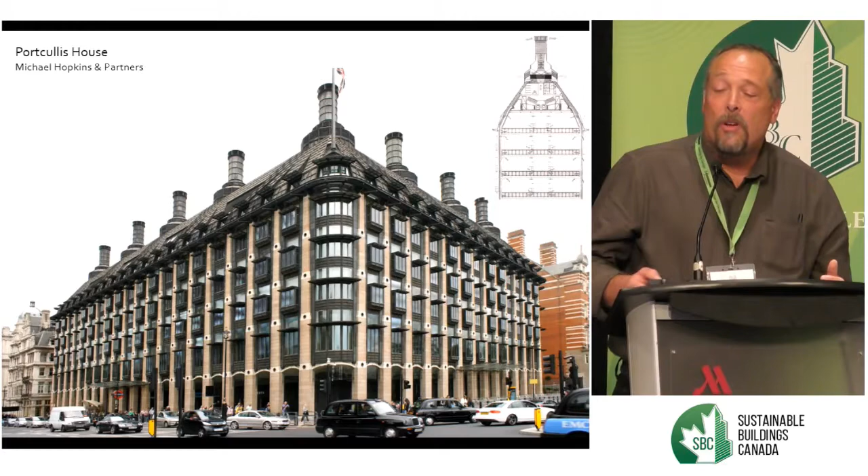We didn't succeed in all respects, but these are starting to be interesting progression towards a contemporary vernacular. And I think that's important because when I walk around many international cities, all I see is a developer simply elevating his plot at the maximum plot ratio the planning department will allow him to get away with. And you just see a series of cubes of different heights depending on how many planning officers they took out for lunch.

There is more to the design of cities than lunching, and not much, but some. There are various principles which the Canadian Green Buildings Festival is really examining, and really the key thing seems to be how do we achieve an architecture which is at best climate neutral. In other words, it doesn't contribute to accelerating climatic change.

So I'll just finish by saying this is a university campus that I designed, a competition we won again at the end of the 90s. And I left the office I was working with because my boss said it's just a very big garden shed.

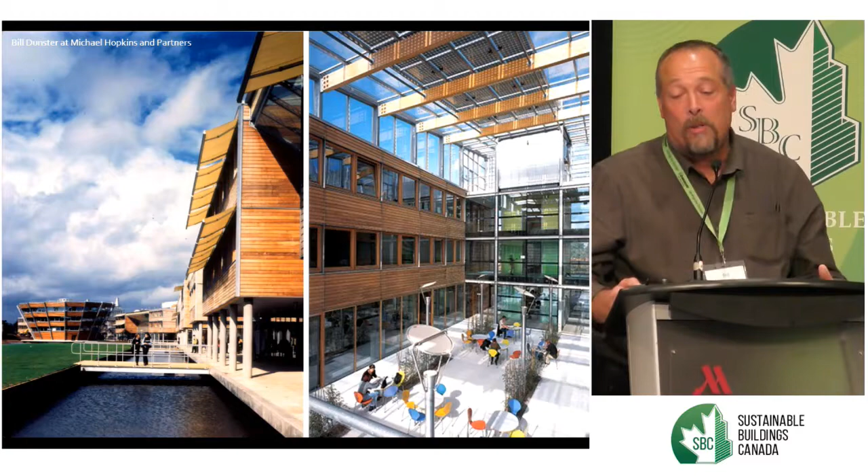And I then realized that actually there was literally no point in designing energy efficient buildings if you didn't address the integration of transport and all the other ecological and carbon footprint issues that are related. So here you can see the first sunbathing island in Nottingham in the middle of a large rainwater storage lake.

So we then built a house following that project to try and show how we could do everything better if we were the client, and my poor wife was the clerk of works, and spent most of her time chasing small builders in and out of the local public house, which is how you get buildings built in the UK.

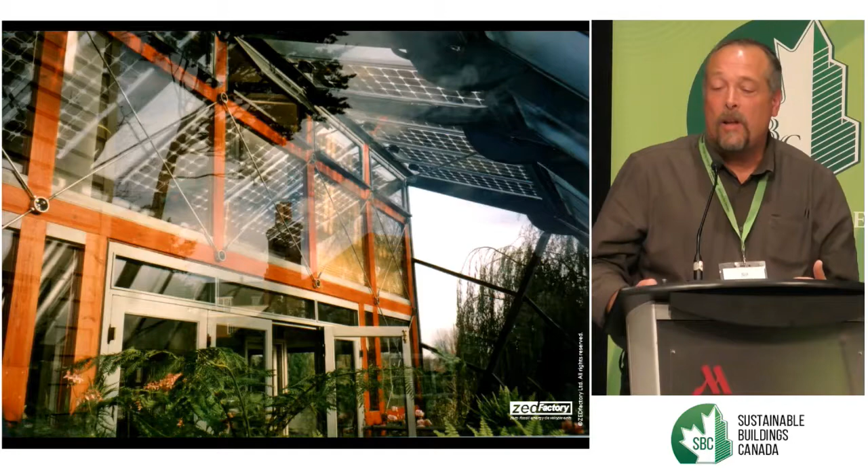You can start to see how some of these ingredients come together. There's a large red shear frame which takes the wind loads but also lets very large amounts of solar gain deep into the plan. It was designed in a flood zone, and every year I'm nearly flooded. We never quite get there, but we did come in with all the services at high level. They come down, and the walls of the ground floor are internal brickwork inside and out, with styrofoam insulation built into the wall, so it's possible for it to be hosed down and back in action perhaps a couple of weeks after a major flood.

This was all designed in the early 90s, and at the time it was regarded as a complete joke. Climate change wasn't really discussed at conferences like this in the early 90s, and it just didn't come on the agenda at all. The fact that there was going to be overheating and so on was really unheard of.

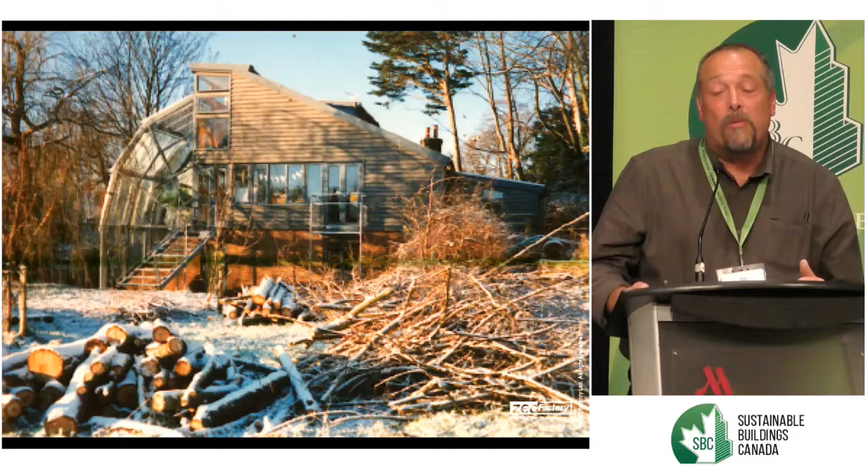A couple of years ago, virtually the entire Thames Valley flooded, and about 4,500 homes had exactly the same problem as us. So we decided to try and set up an architectural practice somewhere between an environmental pressure group, an architect's practice, a master planning practice, a product designer, and perhaps a little project management. We decided to develop all the ingredients needed to make it as easy as possible to deliver a low carbon lifestyle.

We called it ZEDfactory because although we don't actually have a factory, I spend all my time visiting factories, trying to persuade them to change their products or make one component that makes this holistic proposition as affordable and easy to specify for us and other design professionals.

We set up this idea that we could move beyond architecture and get into transport and food production, really looking at all the ideas of a low carbon future and integrating them into one holistic plan. This was well before BREEAM was really going, particularly with regard to the residential sector in the UK.

We worked with WWF and set up this concept of a one planet lifestyle. The idea was to show that you could lead just as high a quality of life with a one planet level of resources as the current three planet level of resources being experienced, and still experienced, in the UK at that point in time.

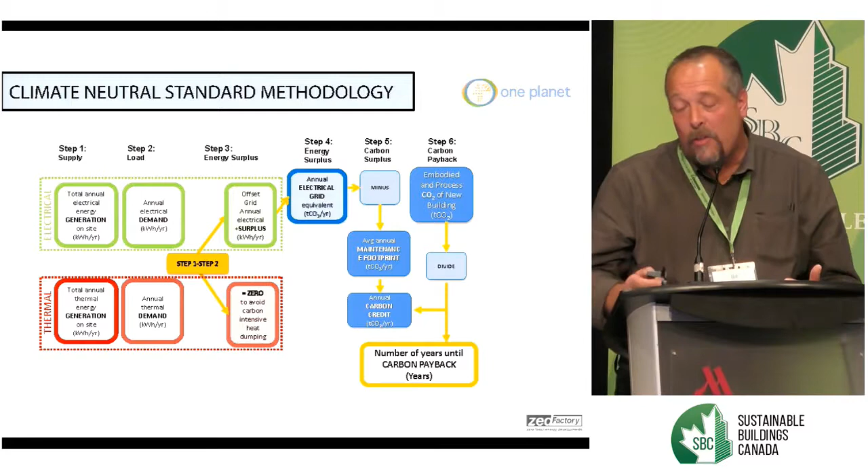So what then happened was we went around talking to social housing providers, trying to find developers, and they literally looked at us as though we were Martians. There was just no interest in this at all. And if you then explained that we actually wanted to provide buildings which made no net contribution to climatic change over their entire lifespan, that was regarded as just insane.

However, we just heard this morning that there's a whole room of people trying to do exactly that. So we have a very simple methodology. I don't believe necessarily in too many checklists and too much interrogation of very detailed data, although monitoring is terribly important as the feedback loop. I think you can make it very, very simple.

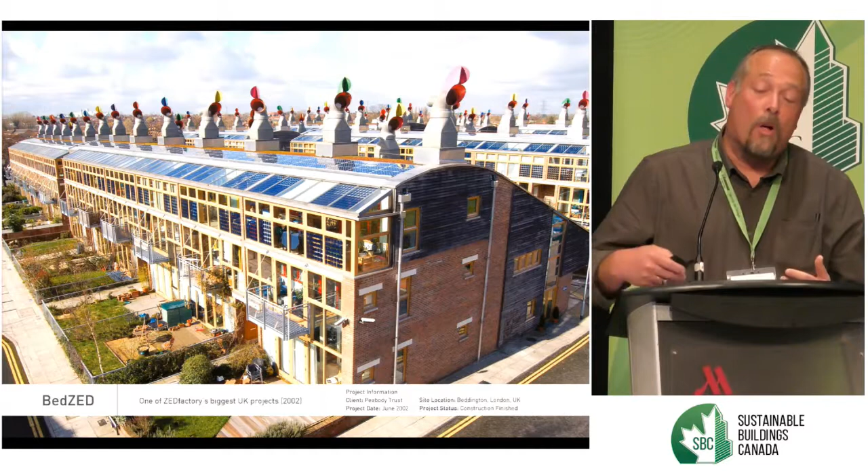And they didn't like that at all. So we lobbied and lobbied and lobbied, and we worked very hard with the politicians, and in the end, we were allowed that the site wasn't sold to Barratt Homes. We bought it for a tiny amount less money on behalf of a local housing association, and we built this project.

This project was intended to show how if the UK had to build, which it still does, millions of new homes, it could do so without building them on agricultural land and green belt. And that was important because the UK is currently importing, was then and is probably more now, importing in excess of 70% of its nutritional requirements.

And often it's coming from a very long way away, such as Africa. So it becomes very important to show how you can have reasonably high density housing models which are affordable to build, are suitable for families, and are really relevant without always turning to high-rise and apartment buildings as being the only urban model worth having.

Now, this has to also be remembered that 70% of the housing in the UK is 50 homes per hectare or less. So one of the things we looked at was housing we'd stayed in, and this is Georgian key workers housing in Edinburgh, which I stayed in when I was at university. And this is Roupell Street, which is old Victorian social housing where you literally had one family in each room, and that's at Waterloo Station.

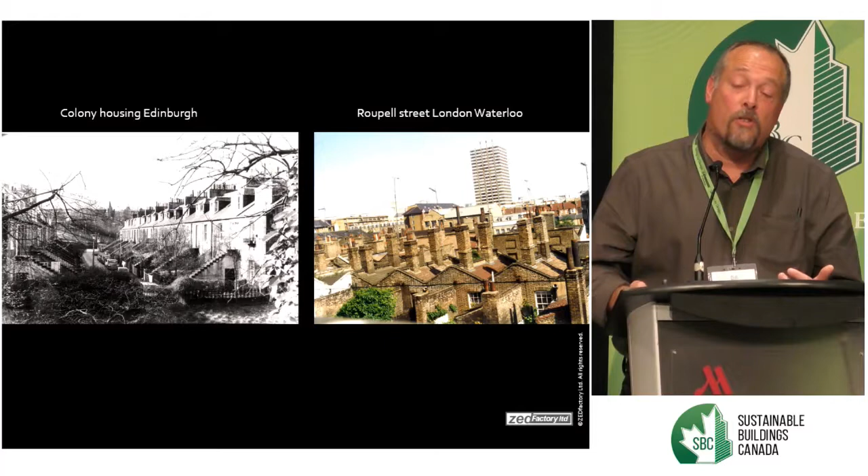The idea was to show how just using the available footprint of brownfield land that was actually ready for redevelopment or regeneration, we could meet the UK's housing requirements.

No one asked us to do this. This was just a way of trying to explain that there were new ways of creating communities which were not in any shape or form following what was being taught or promoted by the government at the time. And there are huge manuals written mainly by new urbanists.

Do you have new urbanists here? Yes, anyway, Andrés Duany, all that stuff.

Manual for streets. There's a sort of classical way of designing which really didn't respect solar energy, didn't respect any environmental determinants that we could see at all.

And then the next thing was we found that we were heavily criticised by the Prince Charles's School of Architecture, who has a mission to, or did have a mission at the time, to try to recreate Georgian England, which was probably the time when the promoters of this school of architecture felt happiest.

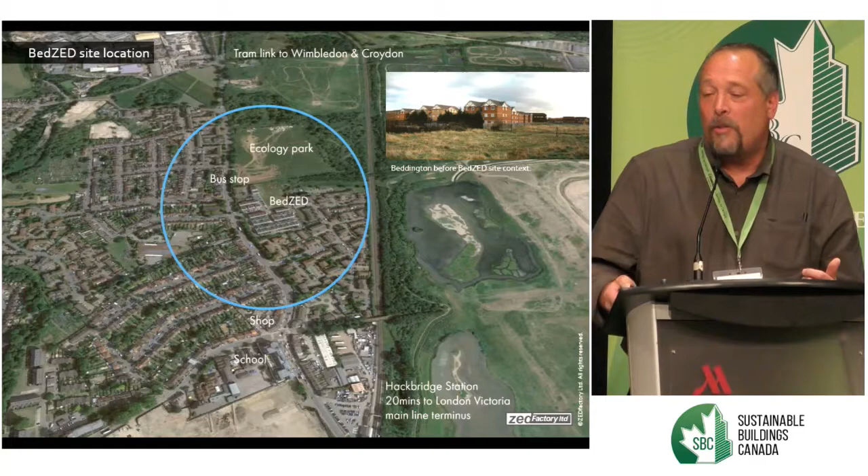So you can see that the housing that would have been built on this site in the top of this slide, and we dreamt up a complete transformation. We were going to plant short rotation coppice, have a gasified wood heat and power plant, a lavender plantation with keyhole beds for picnicking in to start to reduce the smell.

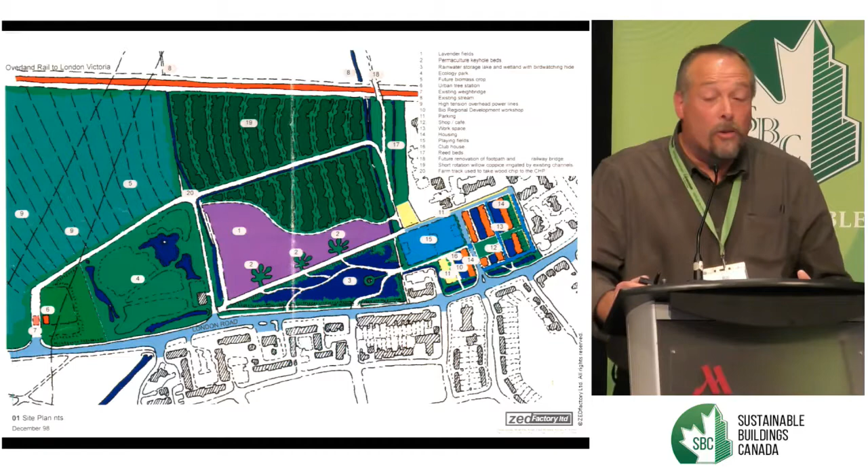We were going to regenerate the local community by introducing jobs back in, setting up reverse commuting so that people came to work here again instead of just going in one direction towards the city centre every day. Start to get more of a 24-hour feel to the place. So what did the local council do? They designated these surrounding fields for gravel extraction and landfill.

If you cook a meal once a day, you have the potential for near zero heating bills. You only need some hot water for washing. So they're thermally extremely efficient, and that's working very, very well. We tried to get good levels of daylight. We tried to give everyone their outdoor personal space.

As climate change accelerates, you can see the living rooms moving across into the gardens. And we tried to get a reasonable density. We got to the point where, if everything works perfectly, it can just about achieve a one-planet lifestyle, providing you don't go on a holiday to the Costa del Sol.

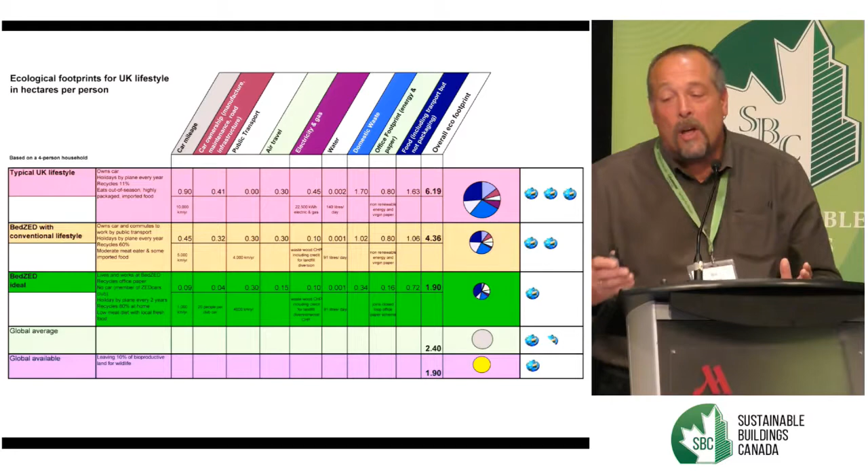So that's the thing that changes everything. If you can—and I don't really feel apologetic about this—I feel we shouldn't tell people how to live, but we can set up the infrastructure and the framework that enables them to adopt this environmentally responsible lifestyle. And they should do it because they want to, because they're personally motivated, or because it's economically sensible for them to do so. And that's great, but there should be no coercion involved, because there lies eco-fascism.

And there's plenty of that coming, because as climate change accelerates and environmental degradation gets worse, there will be draconian responses to disasters.

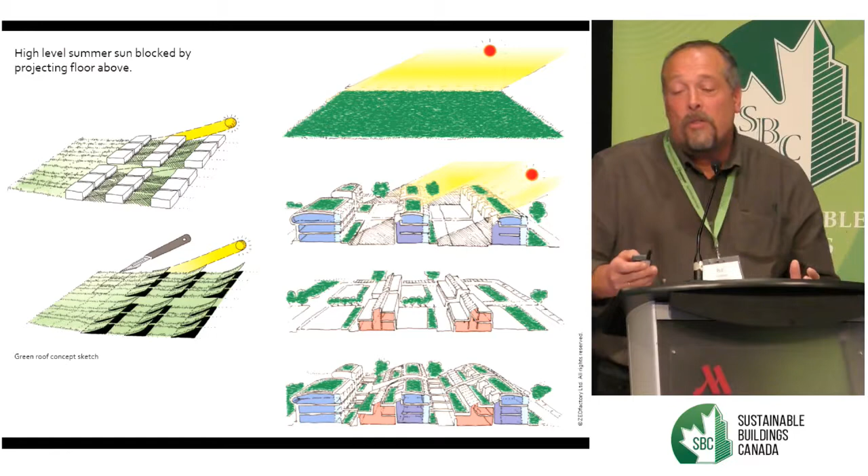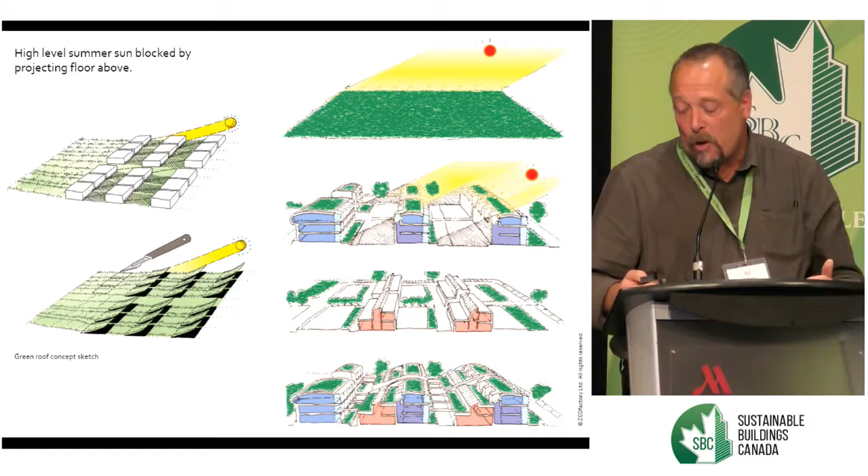The idea was to try and inhabit the site. So you started with an overgrown bramble field. We try to insert the human accommodation, then we try to relay the landscape on top. And that's what it looks like today.

You can see the roof lights getting daylight down to the workspaces and live-work units, which are placed in the shade zone of the housing. The buildings are aerodynamically designed so that the prevailing wind is tracked by the rotating wing cowls, and fresh air goes in the small end and preheats. The incoming fresh air is preheated through oversized flat plate heat exchangers by the outgoing stale air. So the whole thing is ventilating and breathing, and it is a genuinely nice place to live.

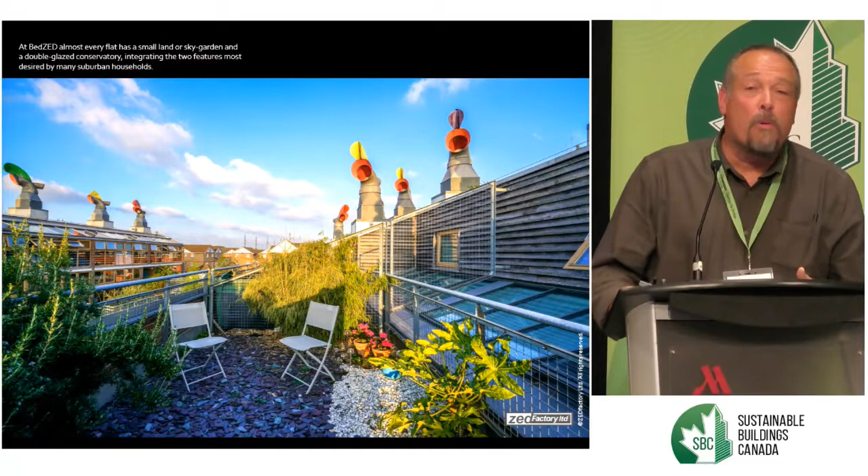We had the first 15-year celebration last weekend, and it was entirely run by what we call BedZED babies—children who have been brought up in this village, and that's the only life they know. They are completely different, much more optimistic and open about the future than other kids we come across who are maybe living in quite degraded urban environments.

And it also has to be remembered that this is not a wealthy community. This is 1/3 social rent, 1/3 shared ownership, and 1/3 private for sale. So this isn't for rich people.

My point here really is to say that the British suburban model, where a developer just goes 3 stories high—and we were restricted to 3 stories on this site—with a pitched roof, has been totally reinvented. The density is exceeded. In other words, we're getting more accommodation on the site with these ground scrapers, and the amount of social amenity, which can be quite easily measured.

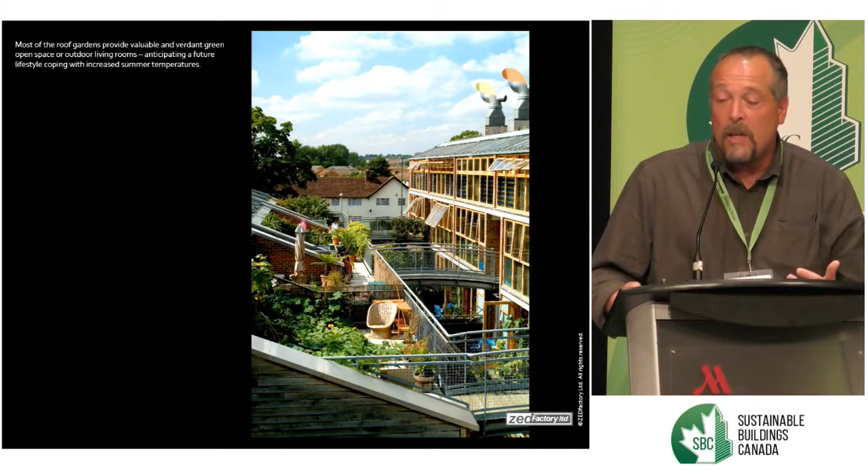Green open space per capita, public open space per capita, seasonably occupiable space such as conservatories or sun spaces per capita. There's all sorts of environmental measures that we've been developing over the years, and it works quite well.

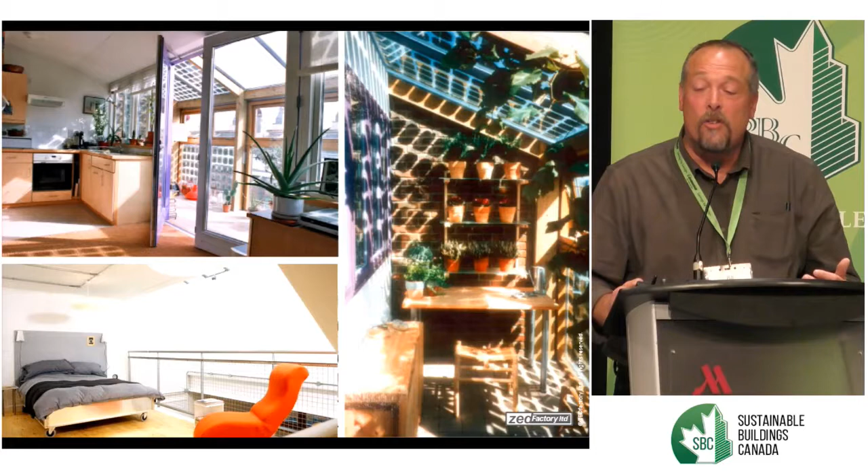There have been mistakes. As I said, we weren't anticipating climatic change as fast as we did. Some of the clients missed fitting the roof light openers off—so although the windows are designed, the roof lights are designed to open, the openers never actually got fitted. But on the whole, it's the passive environmental principles that make this development worthwhile.

So it's the architecture and building fabric first strategy, which is the message here. All of the mechanical things, such as the wood chip fuel combined heat and power plant, which were claimed by all the environmental consultants and technology manufacturers, broke really quickly.

What's interesting is simplicity and minimizing reliance on technology if you can. So here you can see, as suggested by another speaker earlier, you've got the flat above or the balcony above, shading the real elevation, which is set in 1.8 meters.

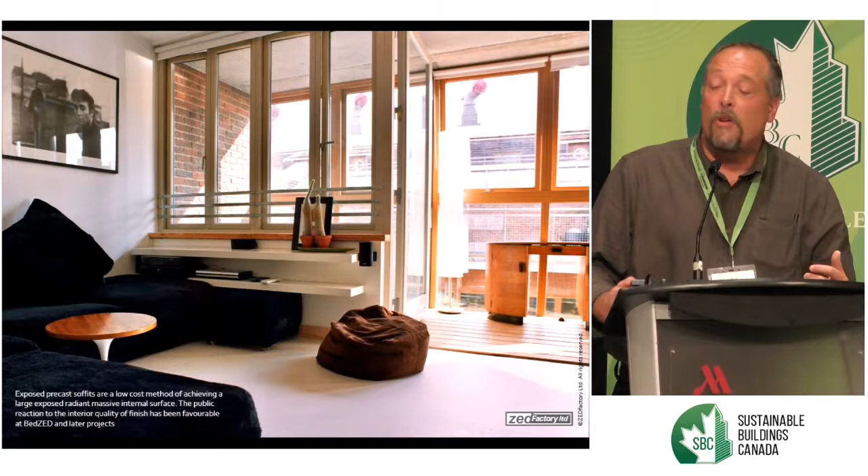You've got two layers of double glazed screens. You've got a seasonably occupiable sun space, which can increase the floor area of your living room. And then you've got exposed radiant concrete soffits and floors, which gives you a very good element of passive cooling.

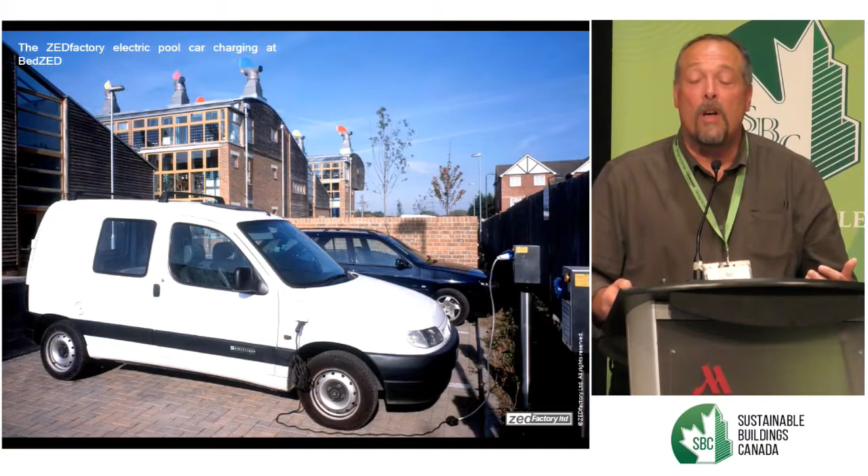We incorporate enough solar electric panels on the building surfaces without affecting daylight to power pretty well an electric car for everybody who lives there. They're not all running on electric cars, but they have the opportunity to over time. So the energy for an electric carpool will come almost entirely from the roof integrated PV.

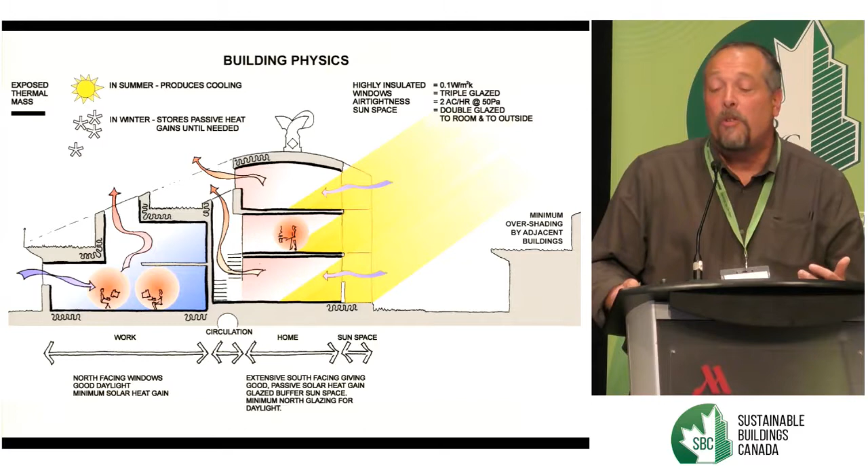With these simple ideas, we then developed a range of tools which can really be used on a whole range of different other constructional systems, solving different problems, different densities, and so on. We started off working with masonry because we felt that was pretty standard. In the UK at the time, everything was made in brick and block.

We developed a special wall tie that hooked in so you could build the outer leaf independently of the inner leaf, and then that went on the market. We do full fill cavities using rock wool.

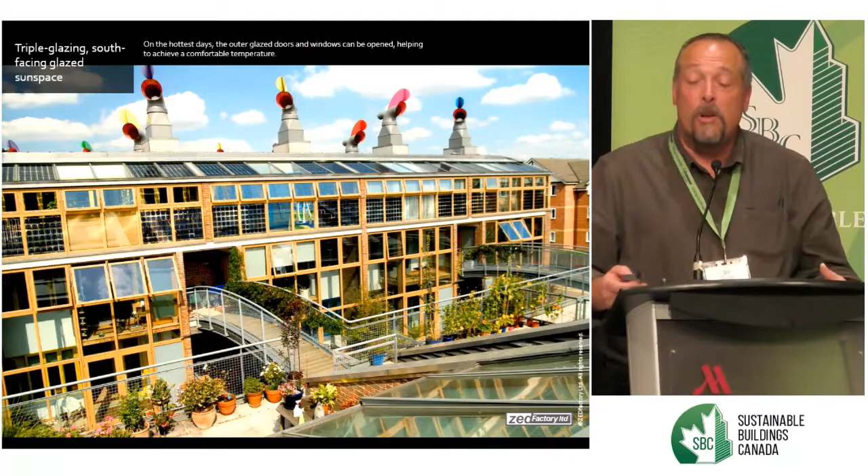We managed to persuade a major window manufacturer to offer photovoltaic cells integrated within a wooden system rather than an extremely expensive, mainly German aluminium system. We used recycled steel taken from other construction sites and demolition sites and refabricated it with re-welding end plates on, and that had a major reduction in carbon footprint.

We used reclaimed timber, which was a real fight actually for all the internal stud-work partitions, because the developers and the contractors desperately wanted to use light gauge steel framing, but this really created quite a lot of employment.

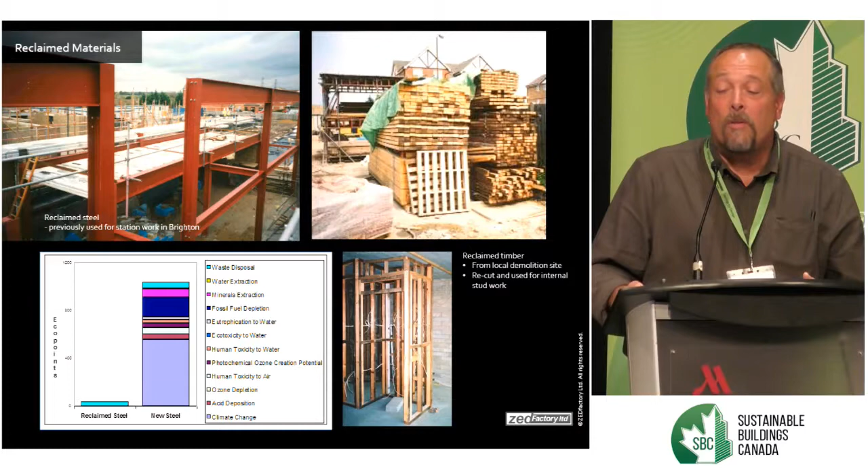We spent a lot of time with the National Physical Laboratory in Teddington developing a wind cowl which turned down to 1.5 meters per second ambient wind speed, so it always had positive pressure at one end and negative at the other. We've tested all the ductwork systems with tracer gas to check that it met the building regulations for minimum ventilation requirements.

So this is a lot of work to put on some poor architect trying to design social housing, and no one's paying for it other than us. We do this work because we are trying to get things better.

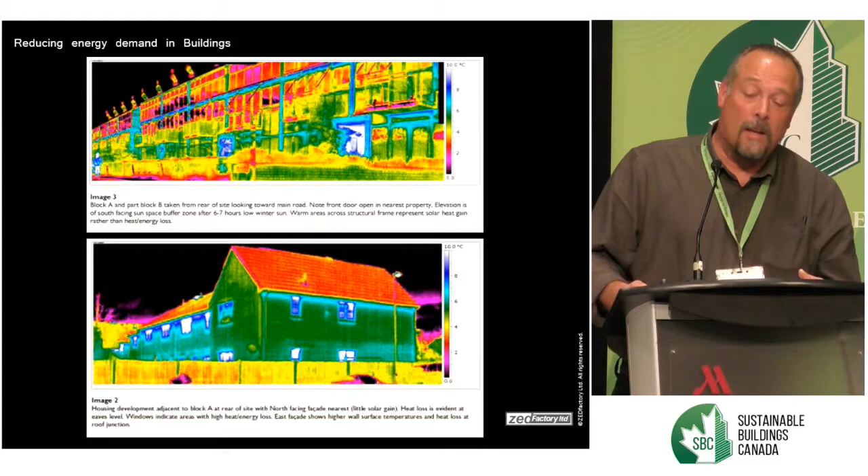That's an infrared shot of BedZED. Even the glazing systems on BedZED are warmer in the middle of winter than the insulated walls on the adjacent volume house builders' blocks. BedZED is far from perfect, and it can be better, and we've learnt a lot from this process.

The first thing, perhaps, is not to believe it when someone tries to sell you very advanced high technology. The second thing is don't rely on a public utility to run grey water treatment plants or black water treatment plants unless you can help it.

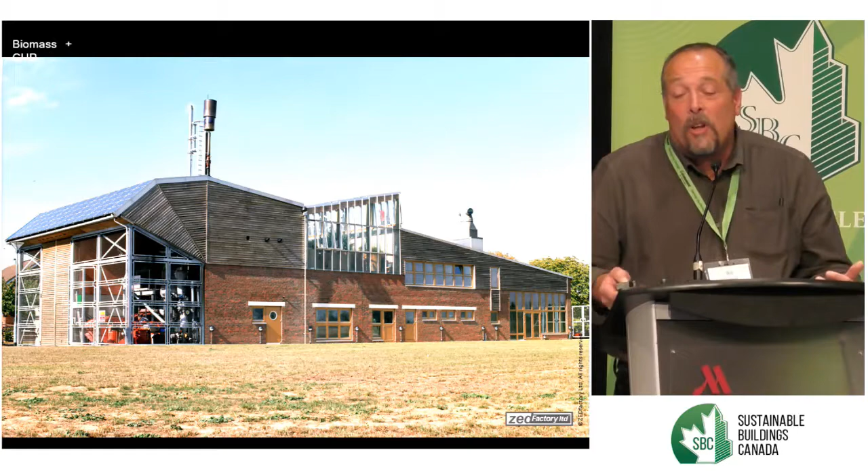The combined heat and power plant, I think, probably worked for about 6 months and never reached full output. It was very much a prototype sold as a viable thing, and the company that fitted it then promptly went bust. It worked on local wood chip, which was supplied from urban tree waste, which was the easy thing.

However, you can't write off this, because now new technology is such that you can get a very nice Austrian - note the nationality - wood pellet machine that does exactly the same job, is reliable, and produces large amounts of hydrogen-rich methane gas, which can go into a conventional CHP gas engine. So that totally ties up with the ideas you heard earlier today, that the gas grid can be supplemented with organic gas that is actually generated from renewable energy sources.

And on subsequent projects, we also use wood pellets in the normal way, using wood pellet boilers.

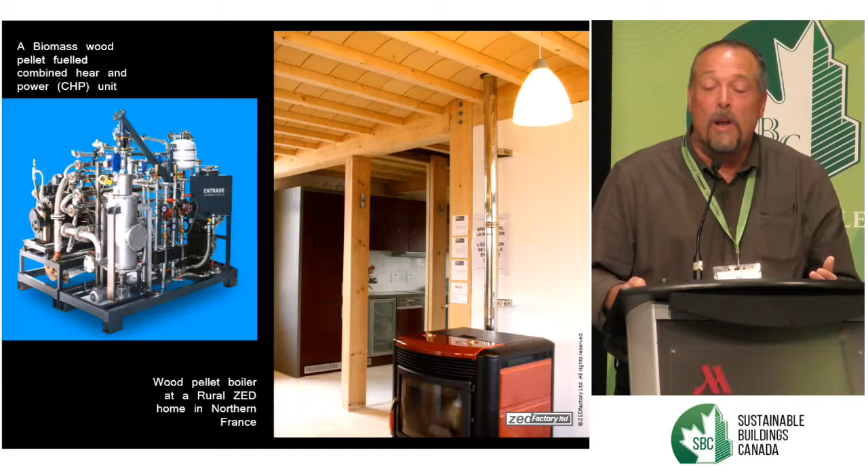So that's really a short history of BedZED. From an urban design point of view, it broke every rule there was in British urban planning about what makes good urbanism.

But we've tried very, very hard on the placemaking agenda, and we maintain that actually it's a lot better than some of the traditional, perhaps more conventional urban projects, which are obviously promoted as best case study exemplars.

So the local community, or the 4 London boroughs that surround this project, completely failed on their recycling targets and have just basically decided to burn all their organic waste in a 100-metre high chimney, which then dumps quite a toxic plume over very high density areas of southwest or South London, particularly Croydon, which is mainly Labour and mainly immigrants.

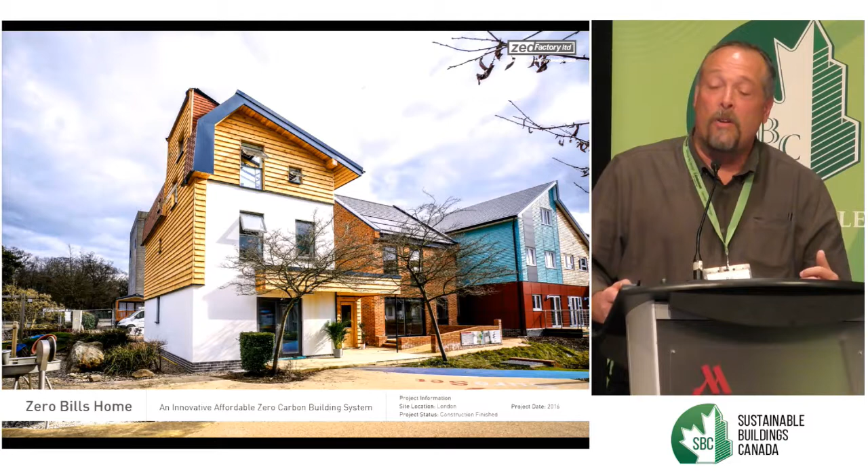So this is a game, and it's a serious one. And if we keep losing like this, we really are in trouble.

What we've done since then is perhaps more optimistic. This is a house kit. This has just been built at the BRE in Watford. You can build it with nothing more than a screwdriver.

And we've completely given up with governments. We've completely given up with standards because we've worked out how to build houses which don't have any net annual energy bills. And if it doesn't cost too much more to make these houses, why wouldn't you build them?

You don't need to worry about concerning yourself with carbon taxation and this and that, because actually the cost of electricity or the cost of energy is rising steadily, particularly in the UK, and the cost of building integrated renewable energy and electrical battery storage is coming down. Again, nothing to do with our country, but it's because economies of scale are being reached in other countries, particularly the continent and China.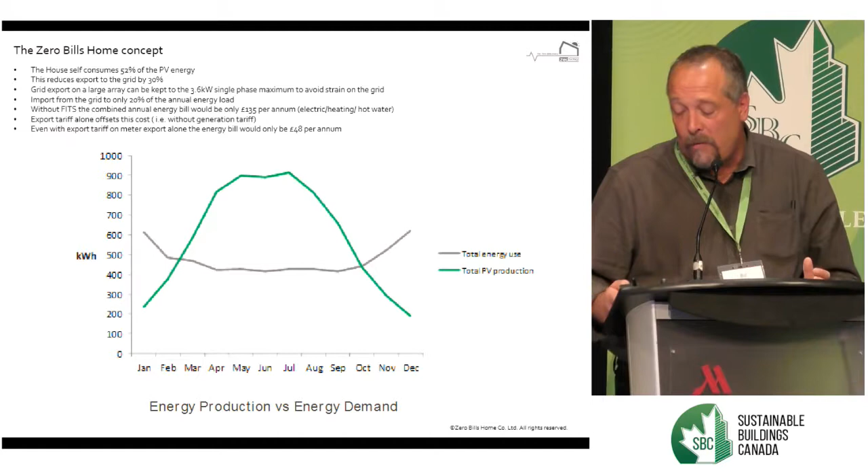So what this shows is a house that looks like that, with a slightly eccentric south-facing roof surface. It's an east-west facing home that can generate approximately twice as much electrical energy as it requires to run it over a year, which makes it safely climate neutral. The total renewable energy generation is about 8 megawatt hours a year. The total self-consumption for running the home is about 4 megawatt hours a year. That leaves you 4 megawatt hours a year to run your electric vehicle that gets you to work in the first place.

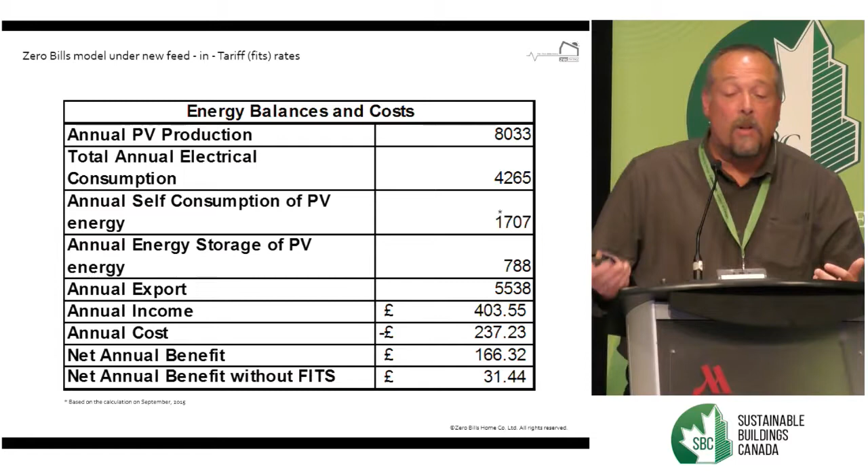So we see this as a game changer. We think the idea of regeneration projects that don't have any energy bills is possibly a politically acceptable way forward, no matter whether you believe in climate change or not.

And the current situation, that is not the case in the United States, and it's not the case in London at the moment. The current political administration are starting to question whether climate change is happening. So conversations that we had 20 years ago are resurfacing.

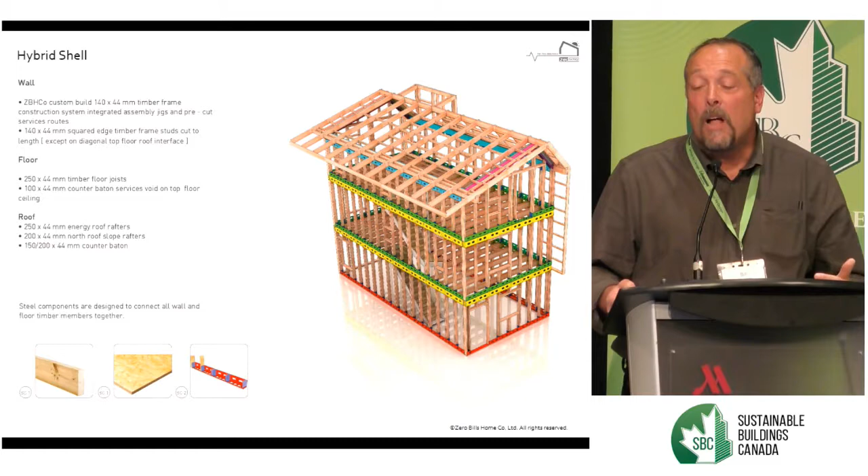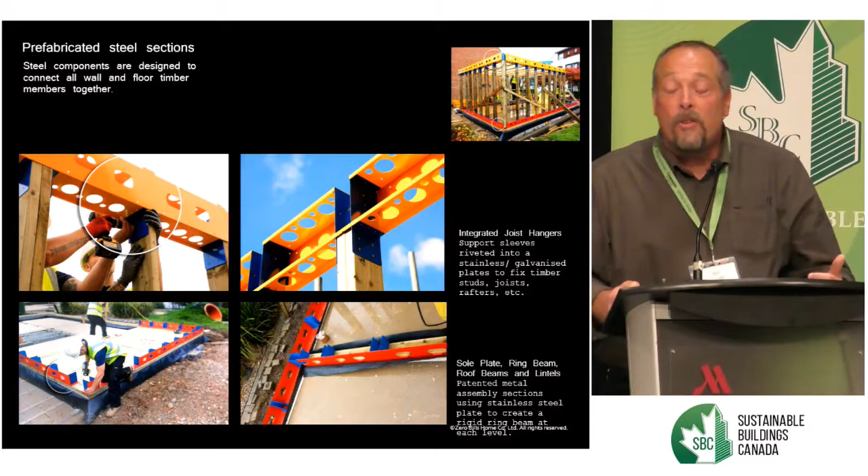So underneath this roof, you have a solar conservatory, again in an unheated space, and we've worked out how to build these homes using very short lengths of relatively low quality timber, which are put together with a laser cut galvanized steel ring beam system. Very, very quickly, you can build a floor a day with 4 people. And I think this shows how a timber frame can be democratized.

Nothing more than an electric screwdriver. We chose a builder straight out of the telephone directory, so they'd never built any of these kind of homes before. BRE have tested the air tightness: 1.3 air changes per hour at 50 pascals test pressure.

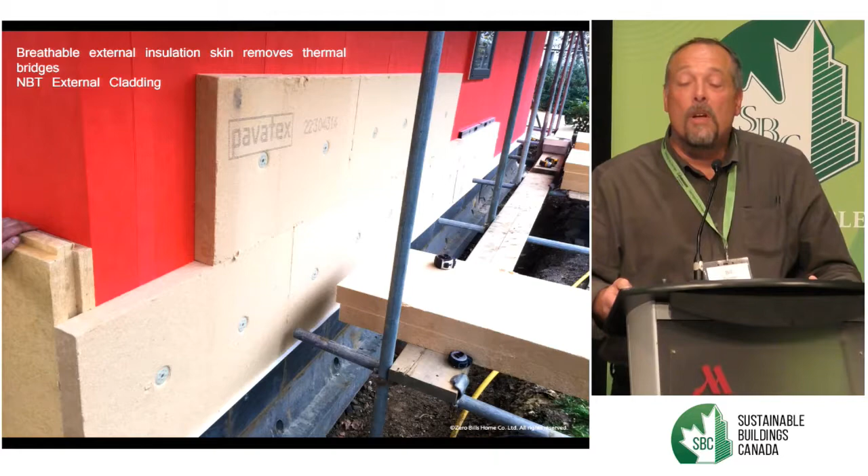It's a forgiving construction technique. We clad the thing in this red skin, which is self-adhesive, vapor-permeable air tightness barrier, and then we put wood fibre or rock wool external insulation, and then rain screen. So that's how we do it.

Pretty well anybody can build this kind of home. Very, very affordable, so you don't have to require any special pleading. You don't have to change the building regulations, because if we have this on the market next door to the product of a volume house builder, no one is going to buy the other home. Why would they? Because the average energy bill in the UK is somewhere between £1,500 to £2,000 a year.

That's the family holiday. So what's changed is that the cost of connecting to the electrical grid is about a minimum of £6,000 per home. The cost of the roof is probably only about £2,500 more than if you put a roof there anyway, because you don't have to buy a roof, as it replaces the existing roof surface. And the cost of battery storage has come down, now about £500 a kilowatt hour, and we put in 1 kilowatt hour of battery storage for every kilowatt peak of photovoltaics.

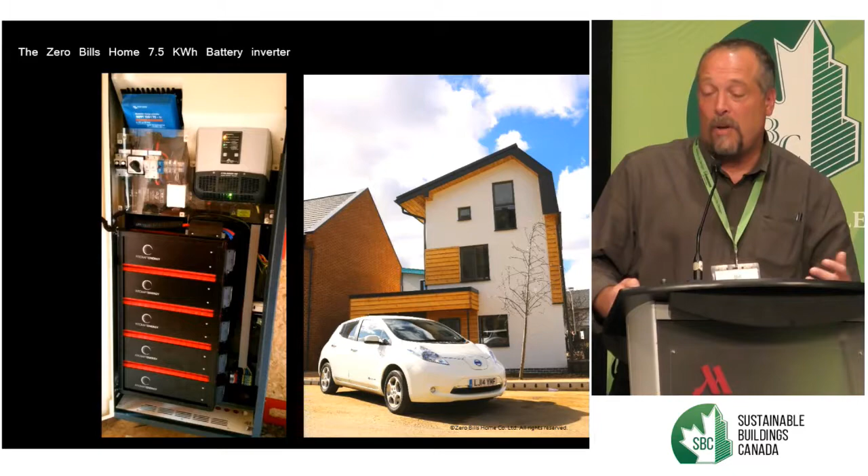This is a smart grid inverter system. It's programmed to only connect to the electric grid in the middle of the night, or whenever you tell it to. And it can be switched on by an electric utility and told to export at times of peak electric shortage.

With these ideas, you can completely change what architecture does, because the urban design, the construction, and the specification of the services package mean you don't need power stations. The grid itself will start to minimize in importance. In fact, we have debates in the office now: do we really want to connect to the grid? Will the client pay for a substation or not? And we've never found a substation that costs less than £100,000.

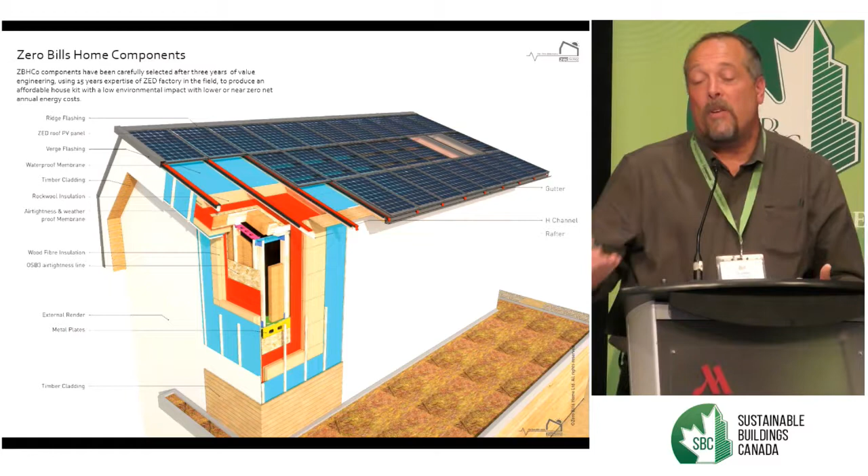So thermal bridging, very, very, very serious. That's now resolved—we don't, as such, need space heating anymore. Material costs are coming down to the point where there could be, at scale, no net increase over the cost of conventional homes, and it's sufficiently traditional in appearance for the general public to be able to choose it without concerns about it being too radical or too threatening.

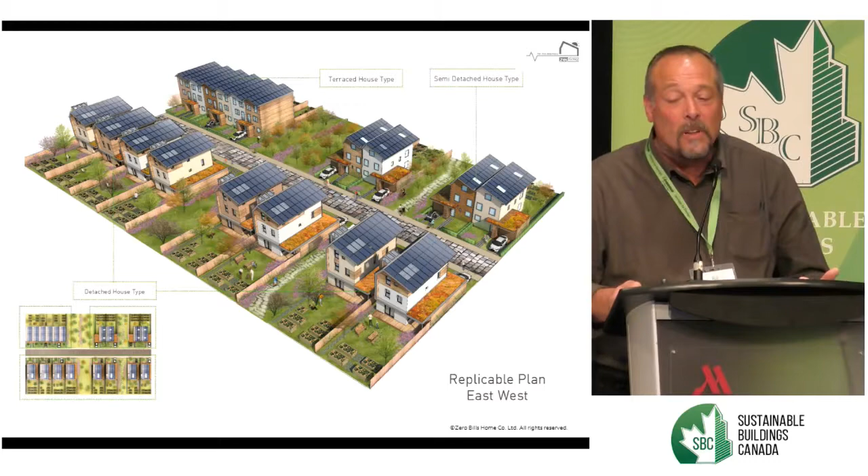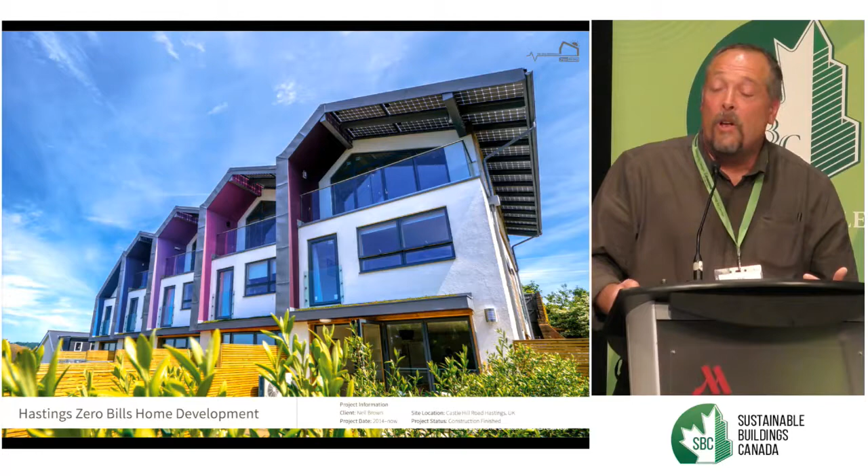What we're working on now is putting these house types into 3D models, so the local community can literally design their own streets. We're working with a very disadvantaged community in Hastings, in the south of England near the sea, on the Ore Valley regeneration to do exactly that. These are near Hastings Castle, just being completed—zero energy bill homes.

It starts to show how the typologies can adapt to more complex and difficult sloping sites. And we're working now on village-type models where the...

Have you got vehicle to grid yet in Canada? Do we have electric cars that you can plug into buildings and they power the buildings?

Anyway, this is just starting to come in the UK, and we're working with a car manufacturer. You don't even need to put very large batteries in the buildings anymore, because if you've got 40 kilowatt hours of battery storage in a Nissan Leaf, which is a perfectly ordinary electric car, and you're only using, say, 5 kilowatt hours of that 40 to run the home, then it's plainly a really good system.

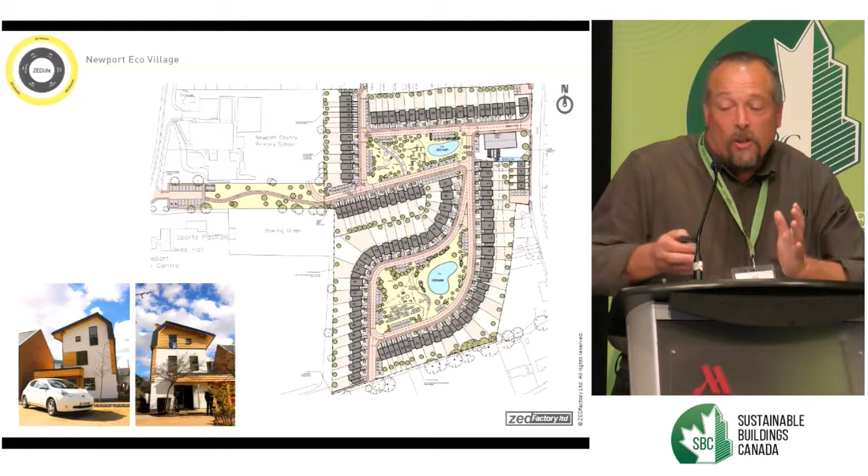So the integration between reducing urban air pollution, reducing fossil fuel emissions in city centres, and changing over to electric vehicles is really starting to look good. There's a virtuous circle there.

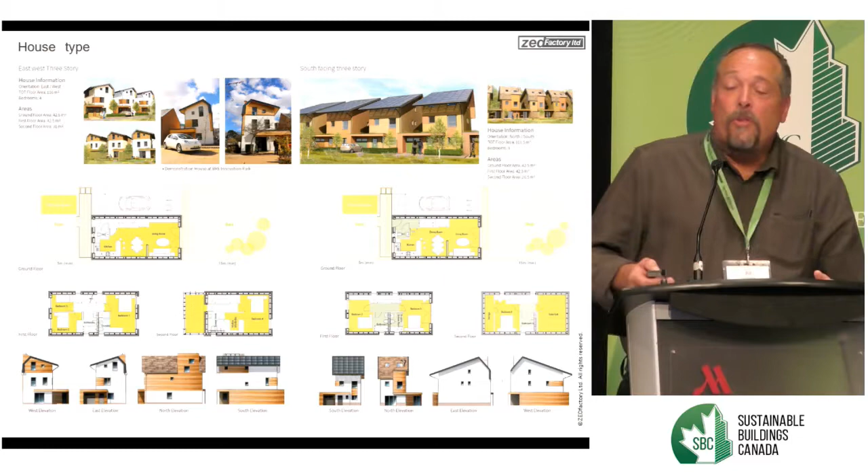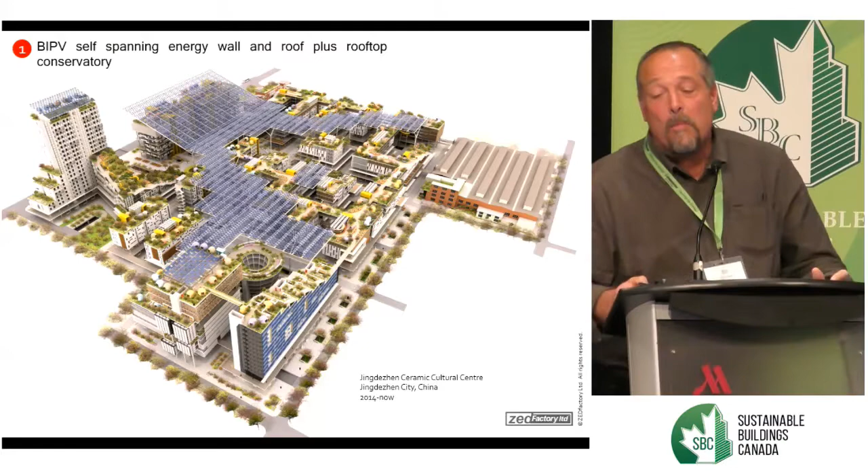So these different typologies we're going to make are now available. We're building one-offs—this is the sort of thing we're doing at the moment, where quite complex small-scale projects are built using the same construction system. And we've gone into larger-scale projects now, showing how those components can solve much larger problems.

So if you redesign the extrusions that go around a solar panel and they integrate and fit together in a careful way, you don't have to buy a roof, because the solar panel is actually made out of durable materials and sheds water really well.

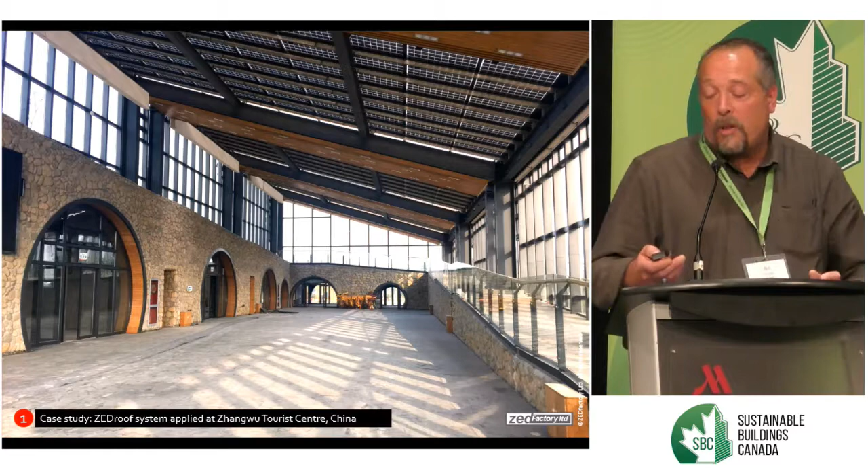And if you integrate clear glass so you can adjust daylight levels underneath the solar roof, then a little village in China is entirely run off this bus station roof.

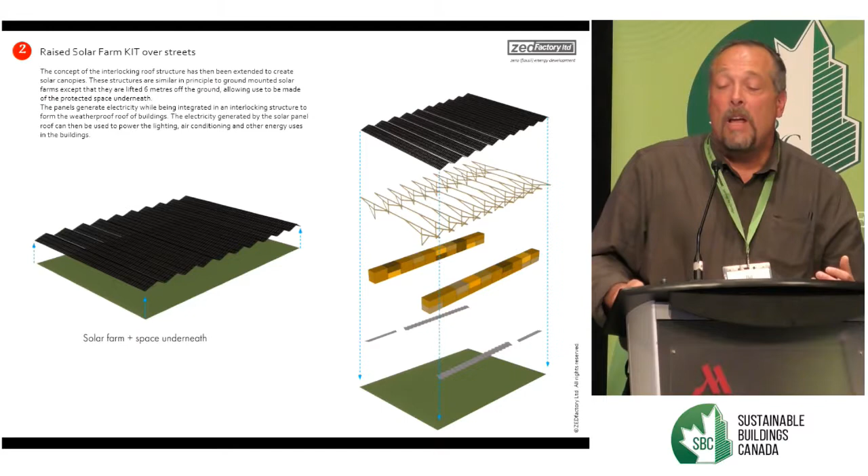And then you can start replacing existing buildings, taking slate roofs off and putting these tiles in, covering over streets so you don't have to put solar farms in the landscape, taking agricultural land. You can use the very large areas of land already asphalted over, used as roads, parking lots, there's huge areas I've seen coming from the airport in Toronto, vast areas of tarmac.

So old school puts all of the renewable energy as separate, expensive items that have to be justified under their own business plan. What I'm suggesting is that the new thinking integrates it within the urban design.

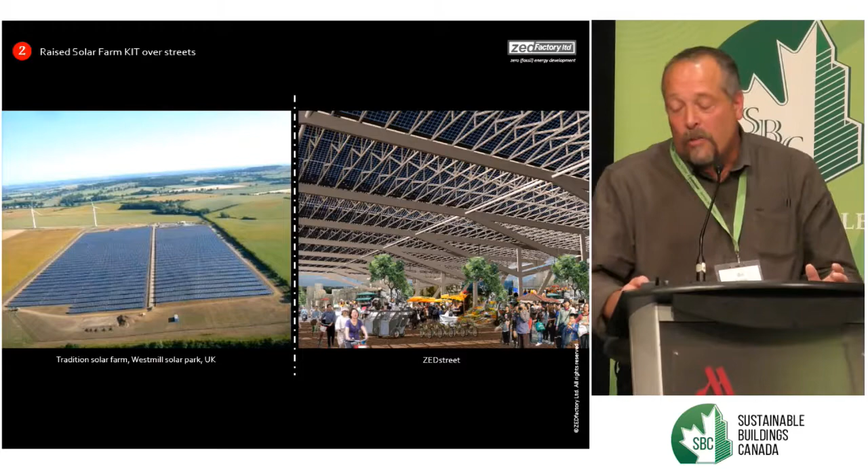This is a coal-burning power station site that we're trying to regenerate as a village. Underneath the solar farm, it looks like this. You have daylight on the north-facing slopes, photovoltaics on the south-facing slopes. It's a holiday village, so you can sleep in camping pods suspended from the roof.

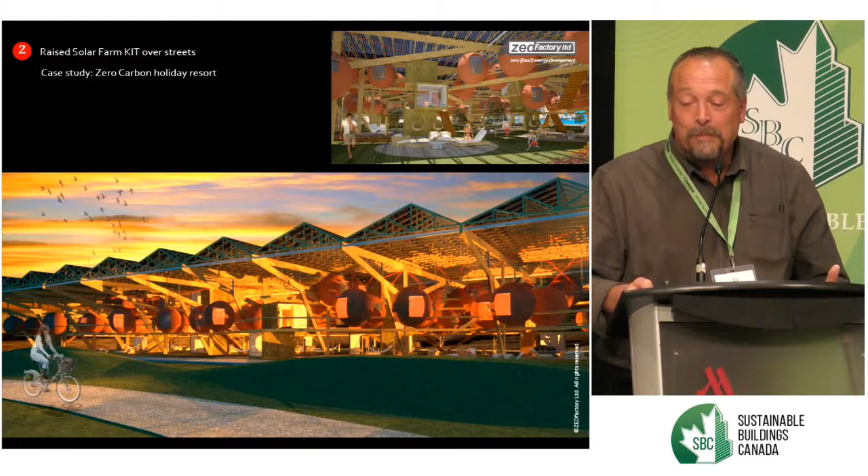And you can also get the same concept to power refrigerated containers, and this is a village centre in Brazil. This is a football stadium, so you can now see how very ordinary buildings required just for running a contemporary lifestyle can be adapted.

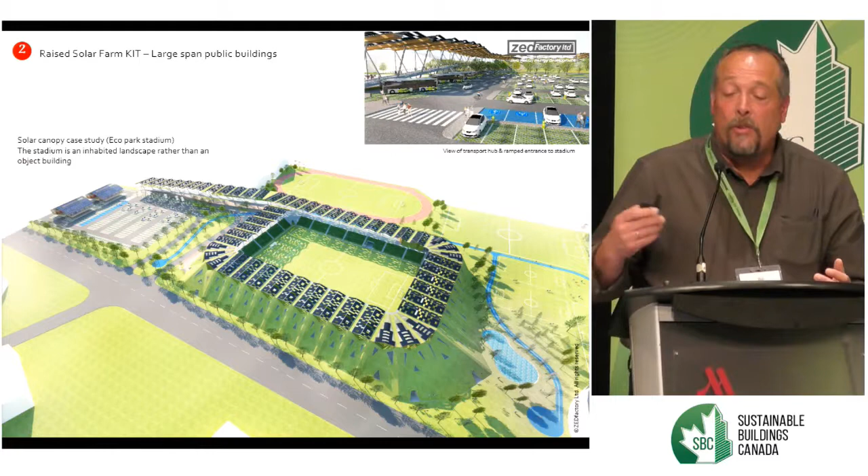What was important about this was the footprint of the football stadium was mainly that it had no direct public transport connection, so we could entirely power a very large fleet of electric buses which got all the fans from the local railway stations to the match and back. When a football game isn't on, the stadium can be used as an exhibition centre or a solar power station which runs the surrounding urban grain.

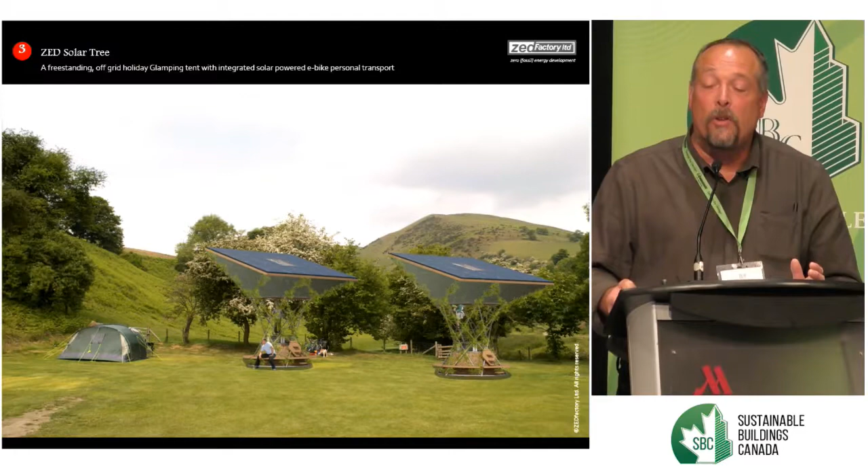And we're moving now, contradicting myself, but we're moving towards solar trees, where we're putting the lithium battery banks inside the tree as ballast, and using those to power smaller off-grid communities, but also residential areas where the architecture was never designed to be upgradable to modern energy efficient or energy generating roofing systems.

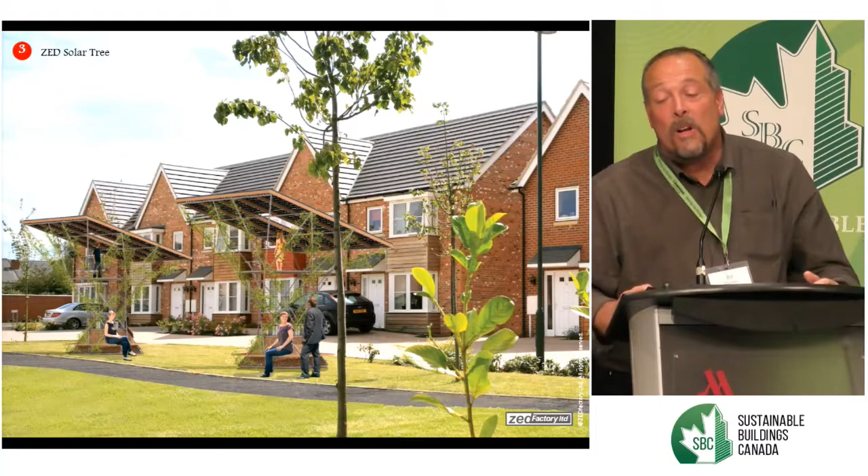And this idea is catching on now. So you don't have to necessarily do the Dutch system, the Energiesprong, where you clad an existing building in solar panels. You could put the tree in the garden.

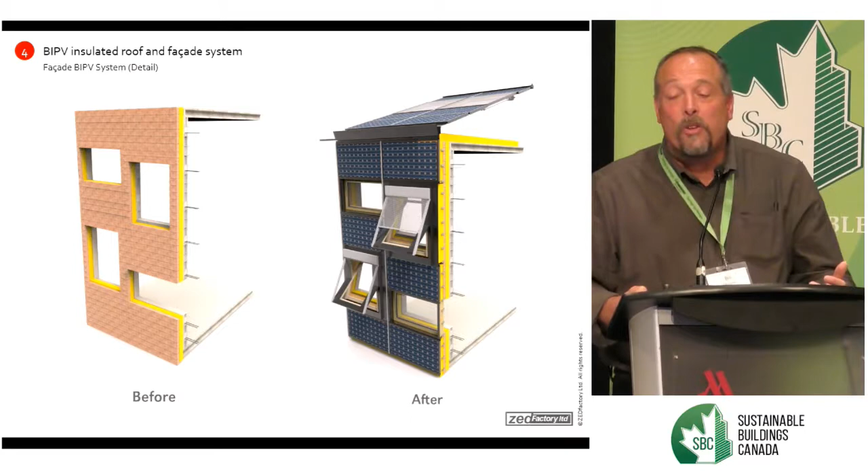So bringing this forward, can you develop a cladding system which integrates triple glazed windows, roof lights, shading systems, solar powered cooling systems, super insulation? Can you pull it all together, and can we use that to renovate the existing building stock, which is frankly the majority of the problem if we're going to meet our carbon targets in time to stop accelerating climatic change?

So what we're doing at the moment is subtly changing the design of the BIPV cladding system to move into the vertical plane, doing walls and roofs and sun spaces with a sort of easy fit together kit, and we're using that on a conversion.

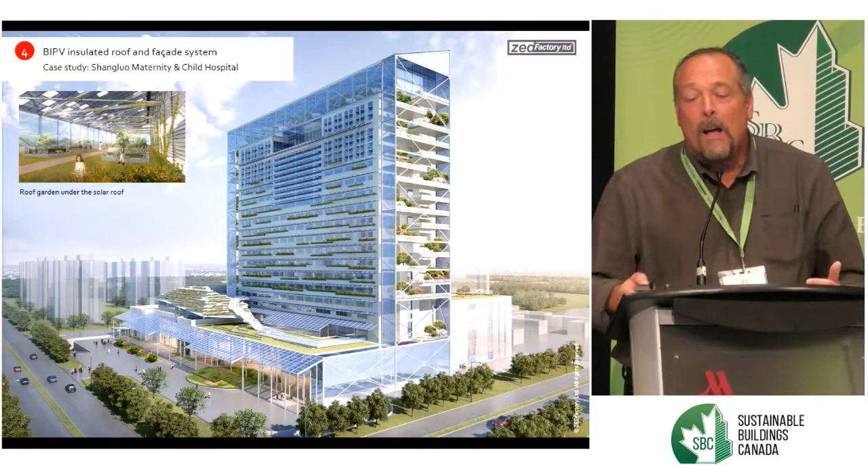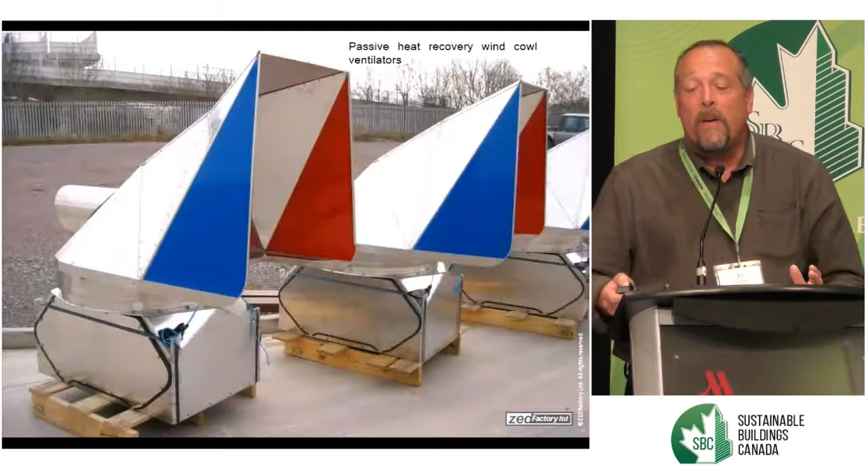It's actually a love hotel, which is being converted into a maternity hospital. Which is kind of logical. So where we're going is making these components really quick and easy to install.

But what's now becoming exciting is no one has any money. So how can we fund this? No financiers will fund it. None of the clean tech investment companies are interested. But the big market is actually the developing world, particularly Africa. And what's becoming clear is a third of all the lights in Johannesburg go off every night due to load shedding, because they haven't got enough electric generating capacity.

So we're working on a new concept, which is a tiny battery. It's 1 kilowatt hour, it fits your electric bike, it clips onto the wall. And you literally can take a city off-grid room by room. It plugs into the wall, so it can charge up from the grid if there's no solar, or you can hang a solar panel over your balcony.

Or you can hang a solar panel as a brise soleil integrated into your flashy architectural design. You can take the battery out and put it into your e-bike, which gets you home again or gets you to work. And we think this changes the dynamic, because you don't have to get involved with power companies. You can bypass them.

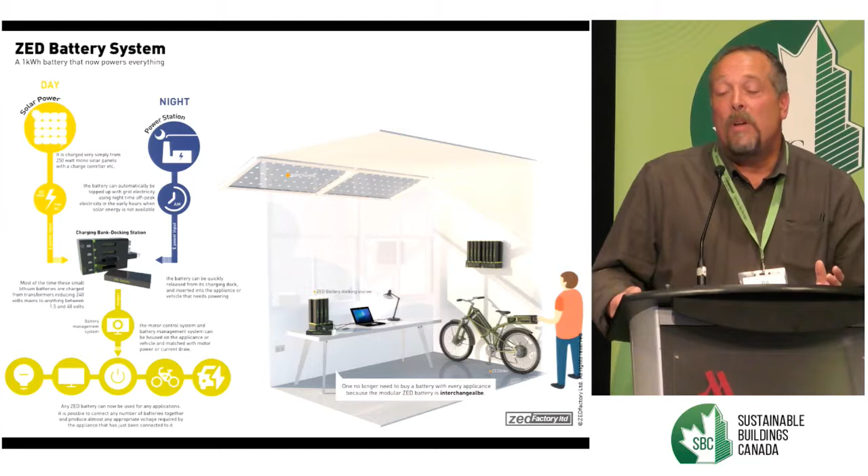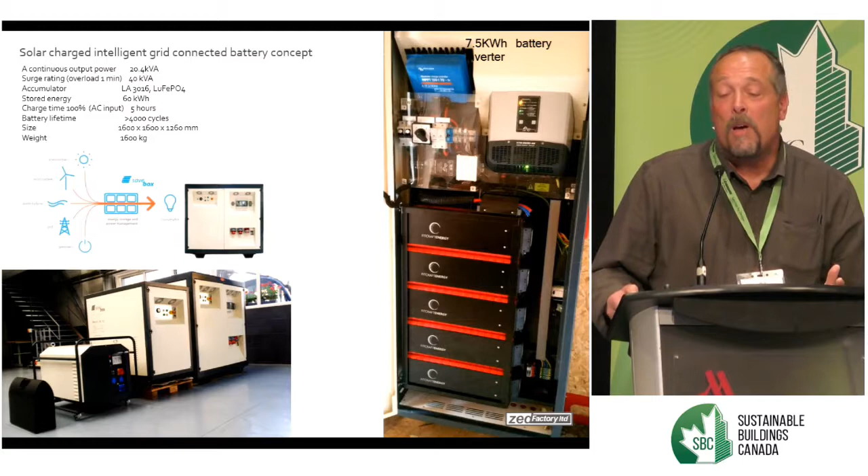Your annual electric bill can be replaced with a couple of batteries, and you'll be fine. By developing lighter weight ways of using this 1 kilowatt hour battery system, you can have cars that resemble motorcycles more than cars. You suddenly find you don't need to buy a Tesla with 50 kilowatt hours of batteries, or a Nissan Leaf with 40 kilowatt hours. Actually, you're just fine with 3 batteries of 1 kilowatt hour.

And then you don't even necessarily need to own the batteries, because you could have just rented them and got them out of a battery dispenser, which happened to be underneath your solar farm, which goes over your street. And suddenly the whole thing, because you've minimized demand...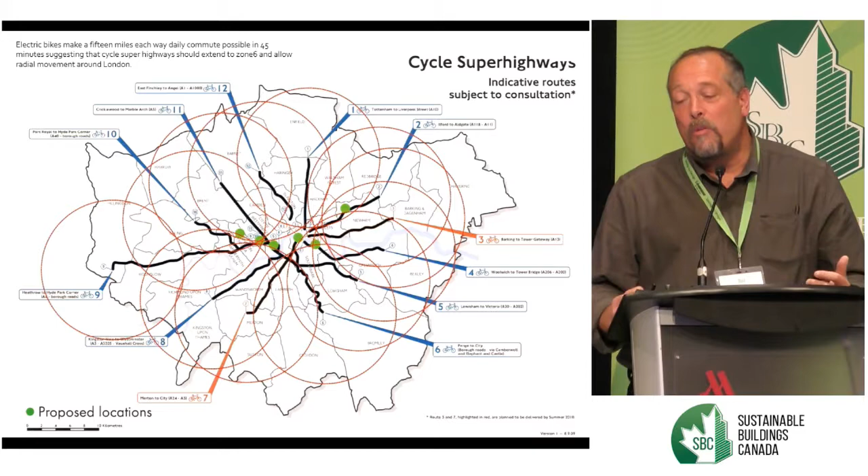It starts to work. If you look at the cost of pretty well any off-grid cordless electrical appliance - I bet you're all rushing out to buy your Dyson vacuum cleaner or your expensive power tools that are all cordless - every time you do that, half the cost of your purchase is the lithium battery. All that can be replaced with this thinking, and it can all be charged pretty well from renewable energy systems.

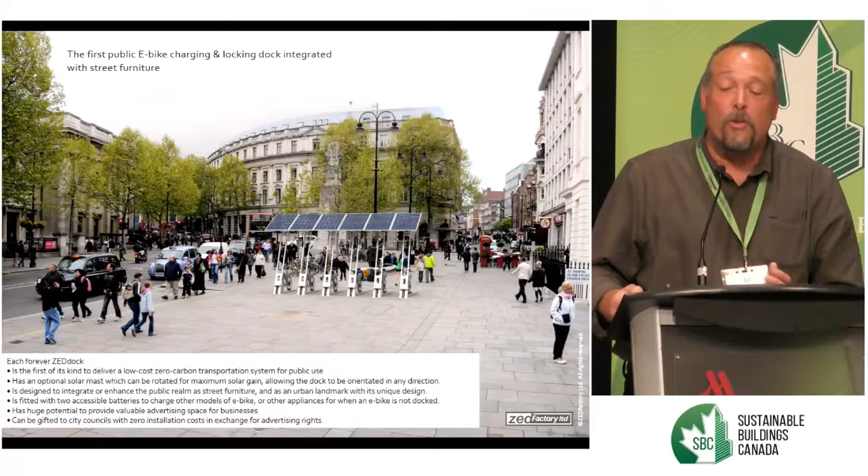So that's where we're going. And the results, I think, are very low cost. It's not for everyone, but it is definitely a good way of improving air quality in a city without making massive investment. You've just got a few of these battery dispensing docks and charge points for electric bikes and lightweight electric taxis and these sorts of things.

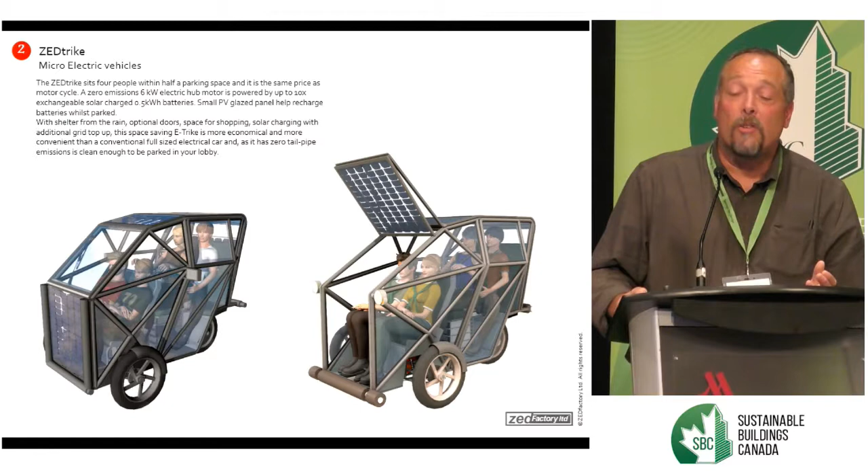And if there's anyone out there that wants to get involved, then tell us, because we can't do this stuff by ourselves. We look for partners that want to get involved, and together we can solve a big problem. But if everybody just simply sits and competes in their individual silos, then nothing new happens.

So, for example, there's a particularly good Canadian free-wheel trike. It doesn't tilt when you go around corners, but it probably could do. But you can run this stuff off this kind of thinking.

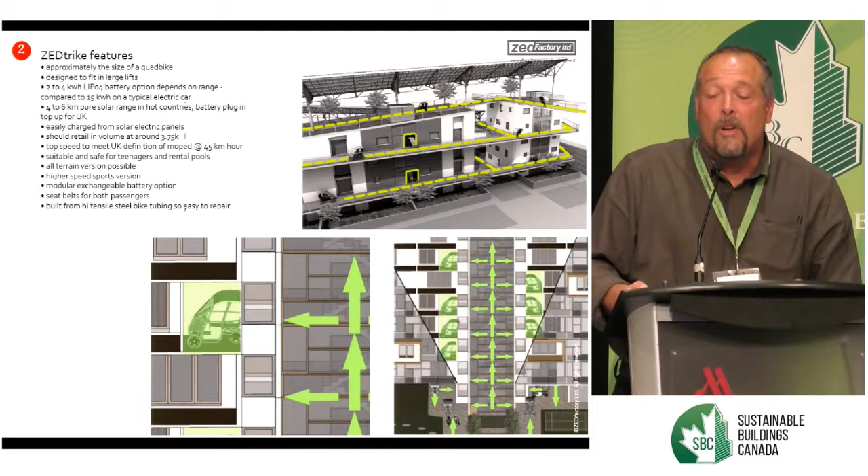And the Chinese housing minister said, well, okay, how does this change the design of an apartment block? Well, you put the cars in the lift and you drive up to your front door, and that's the new kind of thinking. So that's what we're doing. I've been told to speed up, so I'll just show you the final thing that we're working on.

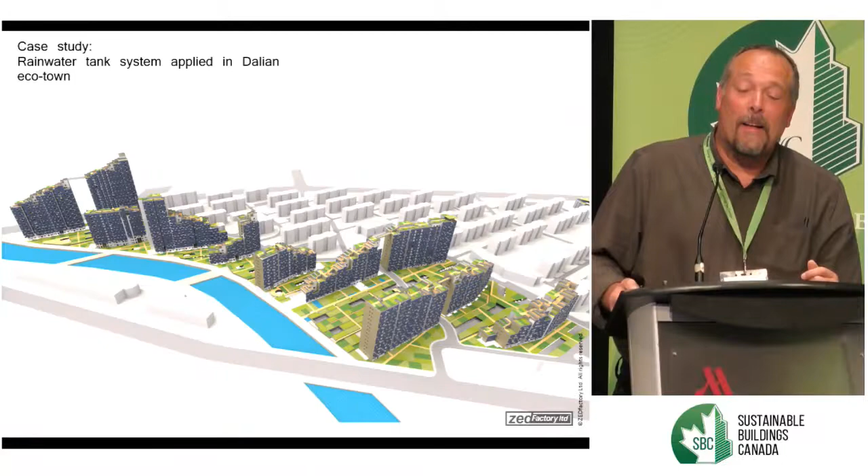No, it's good. It's good.

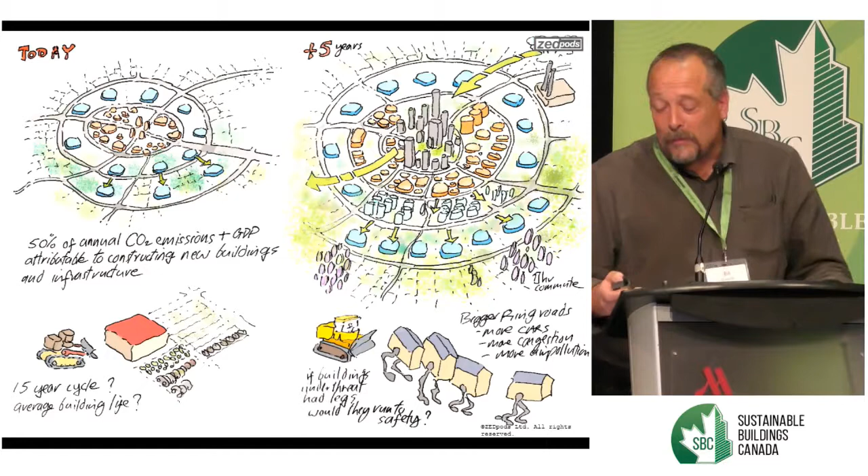So this is what makes it affordable. We found that there's no land available in the UK. This is really the biggest problem, and there's nowhere for young people to live, and they can't borrow any money.

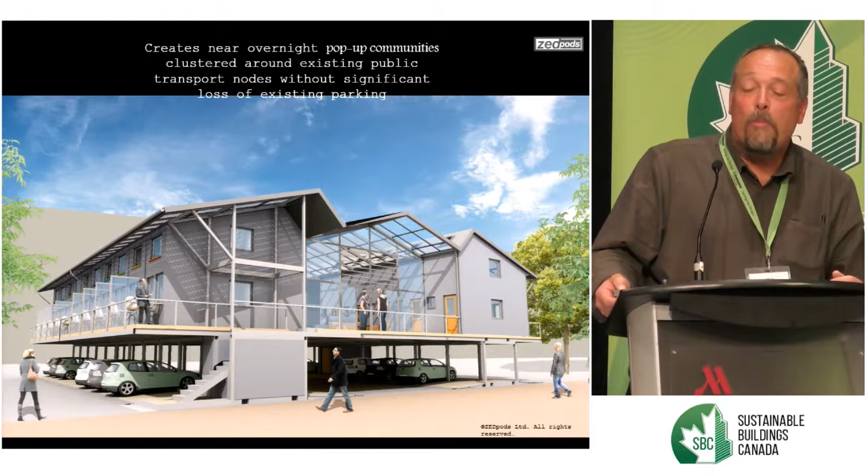So what we're doing is we're building - I've got together a fund. We're building above parking lots with a special steel structure, which is removable, with a solar farm over the roof, and pretty well anybody can afford to live in one of these homes because it's the same price as renting a room in a shared house. And that still gives the investors the return on investment that they require.

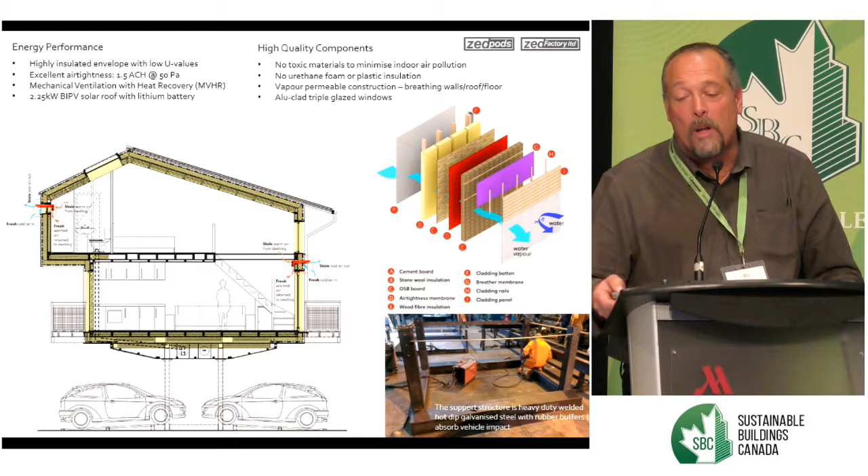So what this suggests is that it's not made out of materials that kill you, such as urethane foams. So Canadians, stop using urethane foam, please.

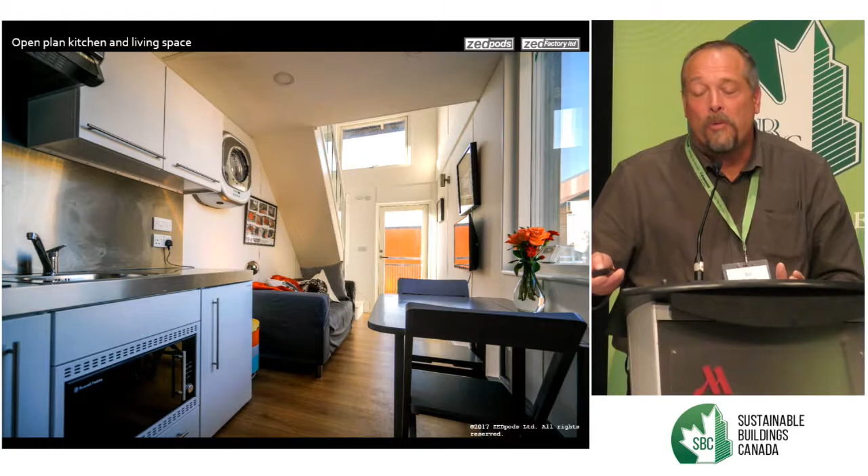So with pop-up factories, local labour, there's a massive opportunity for Canada to supply some of the ingredients for this kind of thinking. There are 1.2 million parking lots in the UK. We're getting a conversion ratio of for every 5 parking lots, we get 1 home. And that means you can house about 250,000 people.

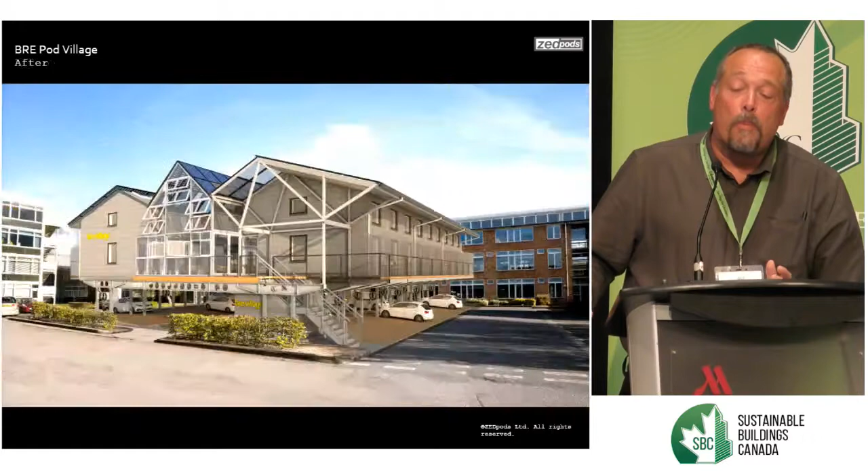So I just propose to you that all these ideas are not out of question. They are actually possible. They are actually fun. They are actually viable. And you just got to get on with it and do it.

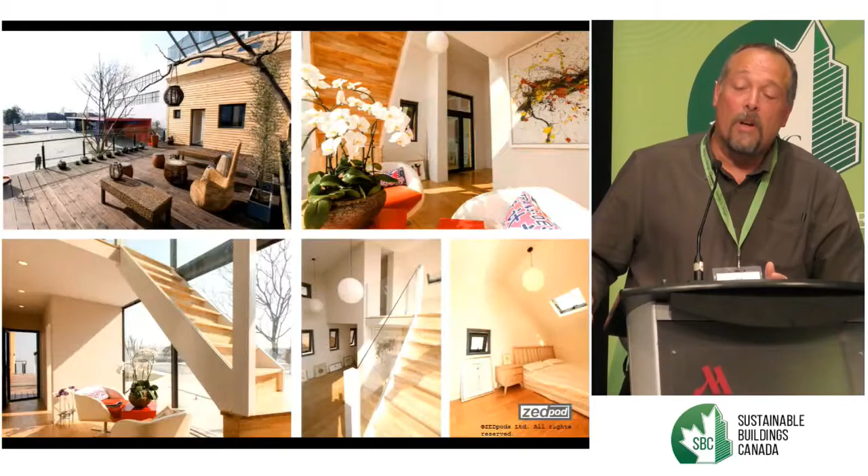And you can apply all of this to existing buildings as well. It's the same thinking. And you can even float your communities. This is the first floating block of flats in London that we've just built.